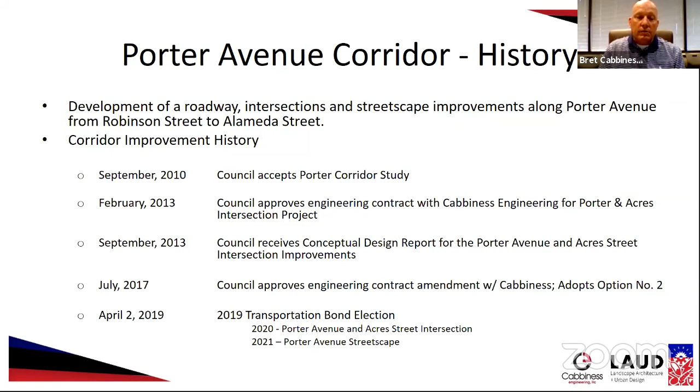So quick history - we talked a little bit about the Ochsner report. It really sparked a corridor-wide debate on how we could improve the Porter Corridor through the middle of our city. It looked at several different goals for the corridor and for Porter - streetscape, access management, roadway design, intersection design, things of that nature.

It had a lot of great input, a lot of great thoughts, a lot of good public comments that were funneled down into what the Ochsner report was. Now, the only problem with the report that we saw was that the report was really conceptual at that time.

It really had no engineering data to support some of its design concepts, although they were very important design concepts and they were good thought-provoking things.

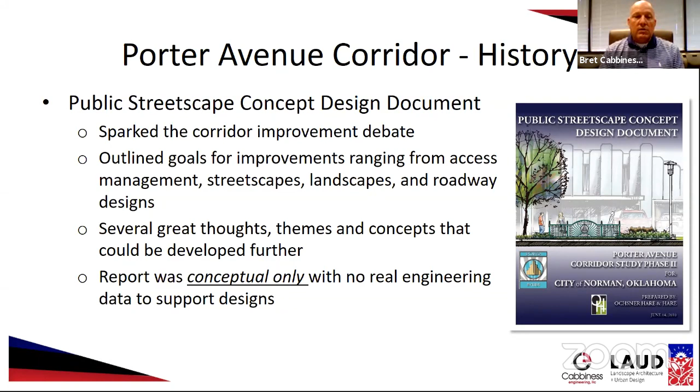So with that, we were hired, as I mentioned, in 2013 to do a conceptual study, mainly to focus on the intersection improvements at Porter and Acres.

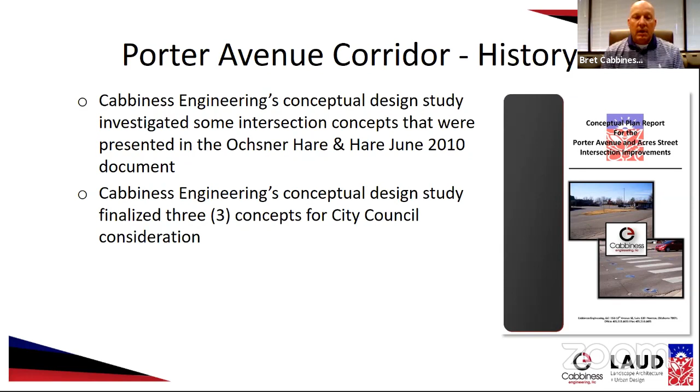We took the concepts that the Ochsner report had, and finalized them into 3 concepts for city council consideration. Those concepts looked like this. We named them design option 1, design option 2, and design option 3.

Design option number 1 looked at focusing on intersection improvements, pedestrian safety improvements at the intersection, and potential left turn lanes off of Porter Avenue onto Acres Street, meaning a 5th lane.

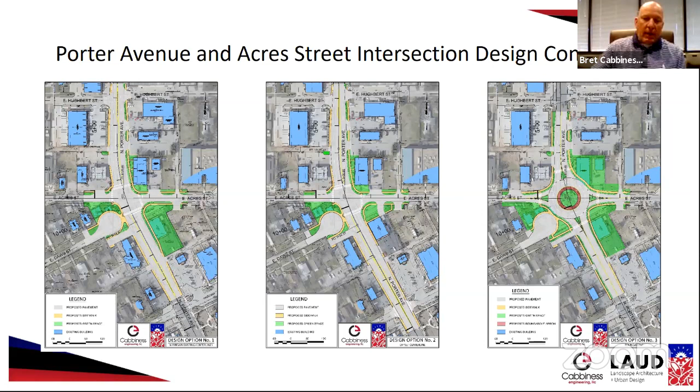Those options and the details that surrounded them were put forth to the city council for approval.

Option number 2 was approved by city council in July of 2017. It had the least impact to the businesses we talked about earlier, only impacting 2 businesses. It still accomplished the overall goal of traffic safety and pedestrian safety, allowing pedestrians to walk from the west side to the east side of Porter Avenue.

If you're familiar with this area, east of Porter Avenue is Longfellow Middle School, and west of there is the new library. So there is a lot of pedestrian traffic there, and there's no way to protect those folks. With a traffic signal, we were going to be able to protect them and give them a very easy path back and forth across.

The project improvements with design option 2 also include improved street lights, drainage improvements, and safer sidewalks.

Now, where this ties into the overall Ochsner report and the overall corridor improvement for Porter is we're going to use the enhancements developed with the concepts for the Streetscape project. We're going to incorporate those into this design as well for the intersection improvements. That basically means improved traffic signal lights, improved street lights and pedestrian lights, and sidewalks that are wider and improved with color, stamps, and staining. So it gives the intersection a very new, clean, and fresh look, and it will dovetail in well, if not exactly, with the overall improvement to the entire corridor.

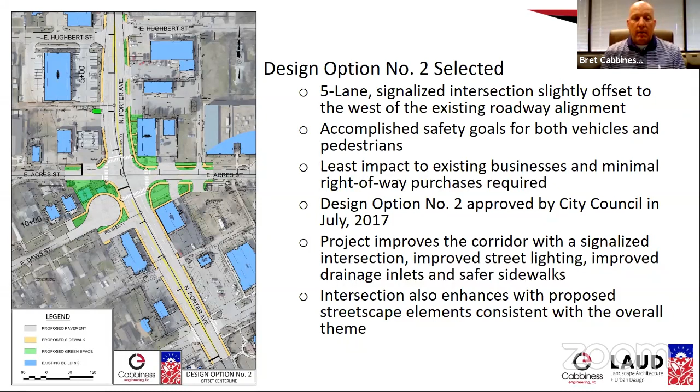Since that concept design, we've had one slight modification to design option 2, and that was basically the modification to the cul-de-sac at Daws. We wanted to again try to eliminate the impacts to businesses, so we came up with a different concept for the cul-de-sac.

We actually moved it a little bit farther to the west of where we had proposed it earlier. The benefits are we saved on acquiring another business, and that was important to us. We could also improve the parking through there, and reduce the opportunity for somebody to try to make a cut through from Daws back to Porter.

By moving it back farther west, it gives the impression when somebody comes down Daws that they have no way to get to Porter Avenue. If we had the cul-de-sac up adjacent to Porter, that would give the impression that somebody driving down there might be able to get to Porter Avenue. We don't want that. We don't want people cutting through the parking lots to get to Porter Avenue.

But we also were able to improve the sidewalk in this area, so we have a sidewalk that will gain access. So pedestrians walking down Daws does have access to Porter Avenue at this location.

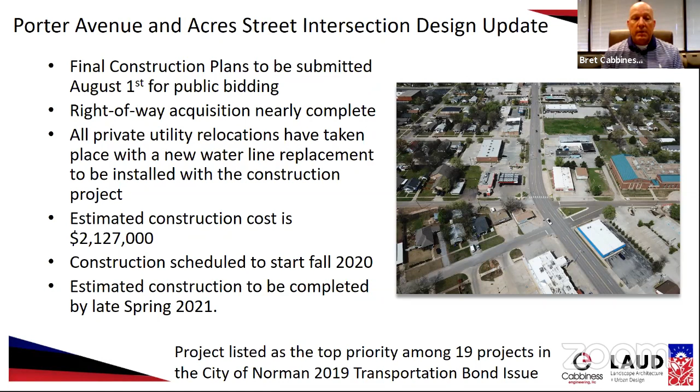Now, the estimated construction cost is a little over $2 million. And that's still in line with the original conceptual design project or budget that we established back in 2013. So right now, this was the top priority project on the 2019 transportation bond issue. Council said that they wanted this project done, and it is getting ready to go to bid and be under construction in the very near future.

So that's kind of the intersection improvement project. Now we kind of start looking at the streetscape project. And again, we reference back to the Ochsner report because it had a lot of great concepts that we could draw inspiration from, some ideas that we wanted to make this corridor improved and bright and vibrant again.

So where we're at right now is we've completed the topographical survey from essentially Robinson Street all the way down to Alameda. We started developing conceptual design themes. And when we start talking about themes, we're starting to talk about landscape themes, sidewalk themes, the traffic and pedestrian light themes, what the poles are going to look like, and how we can also incorporate and dovetail those into the Main Street corridor improvements as well.

We did have one preliminary meeting with the council, and that was back in early March of this year. And so we were ready to have the next meeting, and obviously COVID has kind of impacted that. So we're having that tonight.

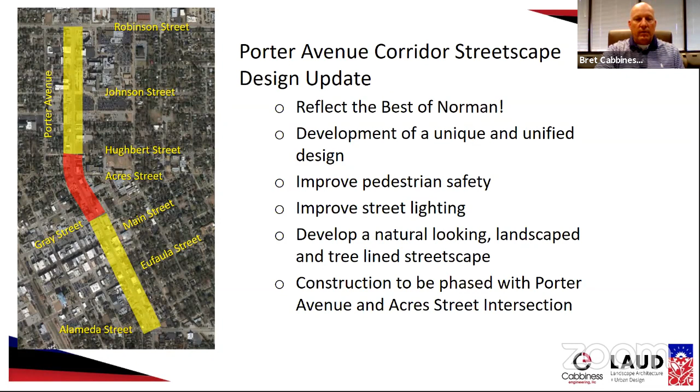Again, we want to improve pedestrian safety, we want to improve street lights, and we want to make sure that it is phased in construction with the Porter and Acres intersection improvement project. We will not do it all at one time. The intersection improvement project will go first, and then near the completion of that, the Streetscape project will be kicking off. So we do have a plan that they will be phased together.

Some of the essentials we want to look at as priorities for the streetscape: trees and ground cover and irrigation, ADA compliant sidewalks, new curbs, the decorative street lights through there, and just envision the black poles with the LED lights that are very bright. That's the concept we're looking at right now.

We want to improve some signage for pedestrians crossing the street, making sure they have a safe avenue across. And then we want to start putting some customized things into the design, such as the stamped concrete or the integrated colors of the concrete. We want to look at a covered bus shelter now that the public transit has a stop just outside Norman Regional Hospital.

So we want to make sure those things are customized specifically for this corridor. But I think one of the really cool things, and we have a rendering of it, will be the gateway entry walls and railings. That shows people, hey, you are entering the Porter corridor through this area right here. I think those will be really cool. And if we have the budget, we'll add some decorative screening, some more streetscape elements, potentially street furniture, and banners on the signs as well.

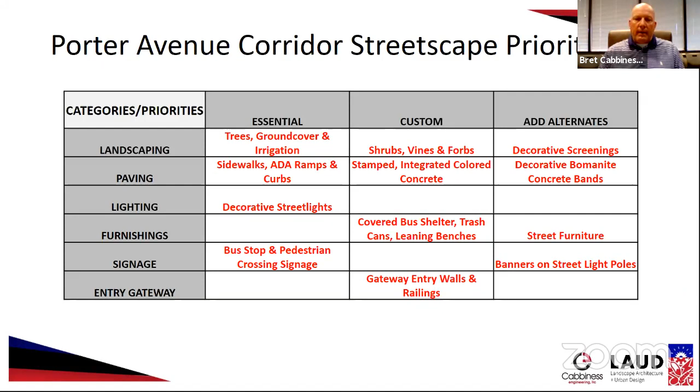So this is kind of the priority list that our design team has come up with. The essentials and the customs are things we're going to make sure get into the scope of the work. And then budgetary constraints may allow us to add some of these other amenities or extras to the project as well. So we talked a little bit about the sidewalks.

The picture on the left, if you've walked down Main Street, you see the banding of the pavers between the curb and the sidewalk. We think that concept is still a good concept. It also adds a visual buffer between traffic and a pedestrian through there. But we wanted to do something a little bit different, more unique for the Porter corridor.

So we're going to look at something of a stamped concrete in this area, and we'll have a different color scheme than Main Street. But at the intersection of Main and Porter, we've got to be able to blend what started on Main Street with what's going to be on Porter. So the two vertical slides here that you see are kind of the blending that we're going to look at.

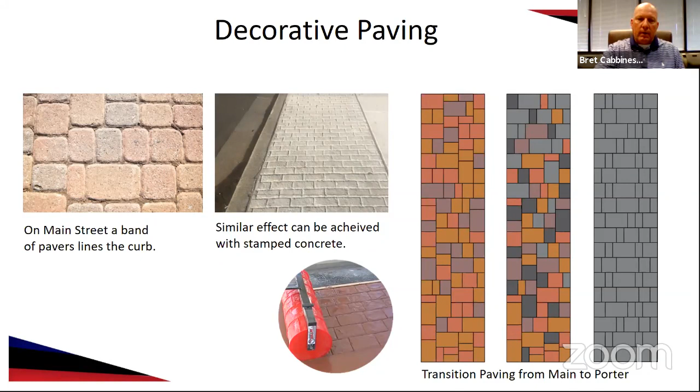And the third vertical is the dark gray stamped concrete—that's the look we're going for on the Porter corridor. It's a little Art Deco-ish, going back to the Oshner report again.

So this is the sidewalk detail that's been approved by staff. Again, you start with the normal colors of gray concrete, then you have the darker bands of the stained concrete. And then the other thing we want to do is kind of a visual banding every so often that will match up with the street lights going down—you'll see a rendering here in just a second.

So as you progress down Porter, you start seeing these bands or these visuals, and you start thinking of the speed potentially. So hopefully this is a speed-reducing visual impact that we want to add to Porter Avenue.

Now, the other thing is we talked a little bit about trees and landscaping. We're going to use a structural soil underneath the sidewalk that will give a space for tree roots and shrubs to be able to utilize some of that space without breaking up the concrete. We've all seen the sidewalks adjacent to trees that have a massive root system and how they've bubbled up and broken the concrete. Use of structural soil like this has been effective in other urbanized areas to minimize that degradation of our new sidewalk.

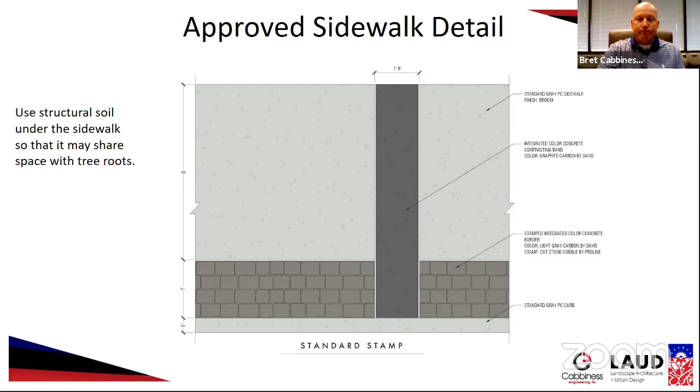So we talked about the speed checks, and this is a rendering. You see in the photo that integrated band, kind of a Bomanite, where you'll start driving down the street and start seeing this almost like a milepost. Hopefully we get people to realize, hey, I'm going a little fast, because they start to see these bands creep up closer and closer. We think those will be very helpful.

There are a few areas on some of the properties out front of the businesses that already have some landscaping we want to try to incorporate, and others where we have just grass. This photo on the lower left is a great opportunity where we can add some additional trees through this area as well. All of the trees and plantings will be more of a natural Oklahoma look, natural vegetation to our state. We've already talked with the city arborist about some of these, and we'll be putting together a schedule on what those look like later on with the design.

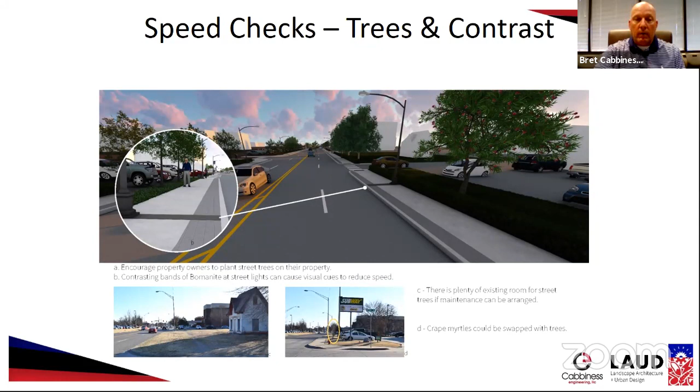So we talked about pedestrian crossings. We want to make sure that they're bright, they're light, visible for folks as we go across. We'll try to limit those locations predominantly to signalized intersections, where a pedestrian has a little more protection crossing the street. But there are going to be probably some others through there that we'll need to highlight, and there are some opportunities for additional signage to alert drivers if there is a pedestrian crossing coming up.

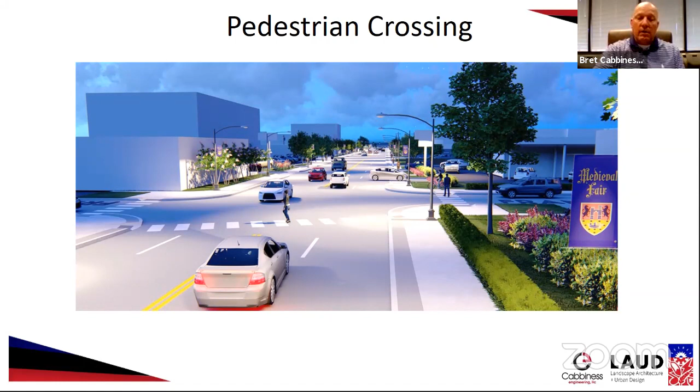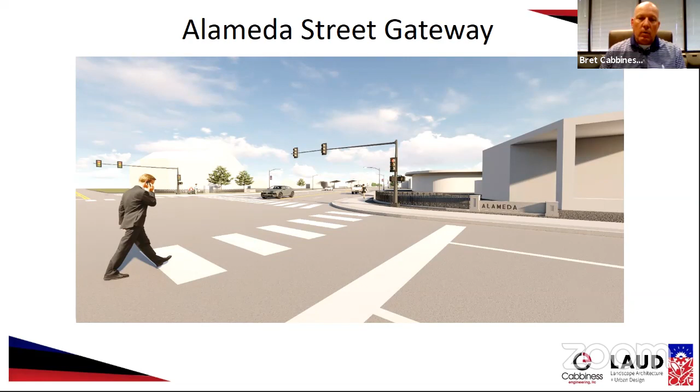So if you look at Alameda, this is looking basically on the east side of Porter looking north. This would be the northeast corner, where the thrift shop is currently located. And then on the west side of Porter, you see that we have some trees in that open space at the intersection. Again, we want to be a visible entryway into this corridor as we improve it through there.

So we talked a little bit about the bus station or bus stop across the street from the hospital. One of the things we think will be a great addition, particularly as pedestrians start finding this corridor coming back to life, is that the bus stop really needs to be enhanced, so we can protect people coming to the hospital or clinics for an appointment, giving them a safe and secure location. So we want to put a bus stop at the corner at Johnson and Porter—again, that's a priority for us. We also want to maybe put a bike repair station there, since a lot of people now ride their bikes to the bus stops and then get on the bus to go across town. So we want to add that amenity if the budget allows.

So we do have some concepts and things that we want to continue to improve upon as we get farther into the design.

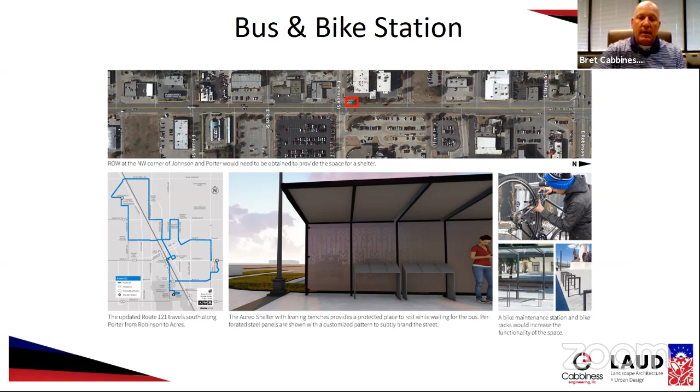So really the next steps as we wind this down: the Porter and Acres intersection improvement project's final public meeting is tonight, as we've talked about. The utility relocations have been completed and they're ready to go. The corridor is fairly clear except for the water line, which will be relocated with this construction project. We're working through the right-of-way acquisitions and easements, and then the plans are ready to be advertised in August 2020.

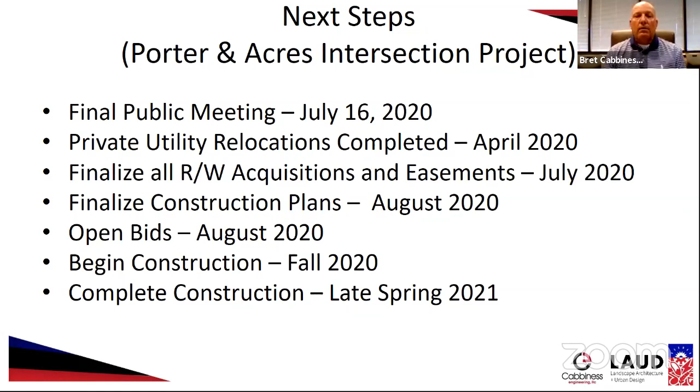That is obviously a little bit contingent on the final right-of-way and acquisitions being taken care of before that time. We want to open bids in August and then begin construction in fall of 2020, and then complete construction approximately 9 months later, which would be late spring of 2021.

The Streetscape corridor project—we talked about the March 17th meeting, and this is really the first kickoff public meeting we're having about the project. We want to push forward with our concepts and get to a preliminary design stage of about 65% complete by October of this year. That's a little aggressive, but we're going to try to push forward to that.

That gives us plenty of time to address questions and talk through potential issues with property owners in this corridor. We don't anticipate any utility relocations other than the street lights. All down Porter Avenue will be moved and improved so they're not right next to the roadway and the footings, so my daughters don't run into them driving down Porter next to a truck.

The final construction plans are going to be in March of 2021. We hope to have bids open in spring of 2021, right on the heels of completion of the intersection improvement project. Then hopefully construction of the streetscape will be summer of next year, and completed into the early or late winter—that should read 2022. Kind of got a little backwards there.

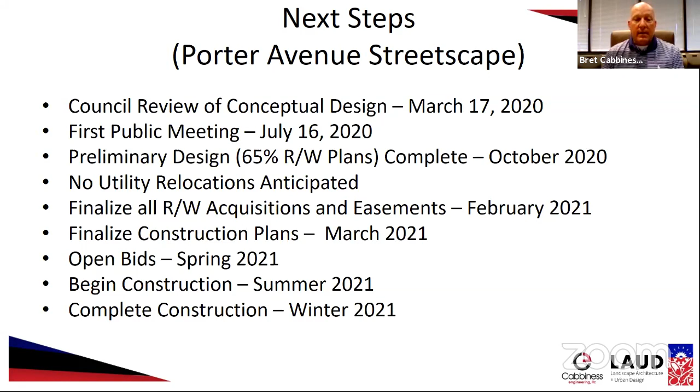So hopefully in the next couple of years, this corridor will be bright, it'll be vibrant, it'll be pedestrian friendly, it'll be improved for vehicular traffic through there. I think it'll be a great project and potential jewel for Central Norman to make this area come springing back to life. So with that, again, we come back to the comments or questions page.

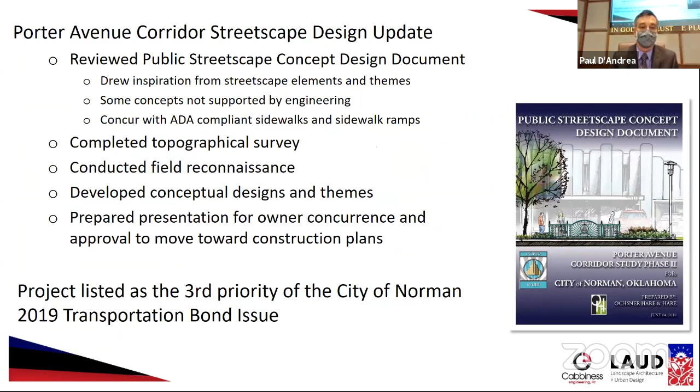Someone has asked if we could please go back to the slide showing Porter and Acres. Okay, let's get that back up for a few minutes. Assume the plan view. Probably that one. We've got some other questions coming in here. Slide that down, I can probably look at it.

Ty Hardiman says, are you saying that the future daily traffic count requires Porter to remain 4 and 5 narrow lanes? This seems like a traffic plan from 1960 instead of 2020.

Again, I think Larry's going to be able to attest to this a little bit more than me, but with the James Garner Avenue project, that is what is projected to take a lot of the traffic off of Porter Avenue for people going out of Norman or coming into the downtown area. Again, we recognize the Hiland Dairy is going to be there, so we know we're going to have truck traffic as well. But again, we're constrained by the right-of-way on what we want to get accomplished.

Yeah, I will add to that, Brett, if I might. Again, that's exactly right. In the Porter corridor study, there was a very brief transportation analysis conducted really for this very point. There was a desire, the questioner is exactly right, there was a desire in the Porter Corridor study in 2010 to narrow the number of lanes. There was discussion about roundabouts here at Acres, and I think a roundabout perhaps at another location in the corridor. There was discussion of a 3-lane configuration. All of those things were really valid discussion points.

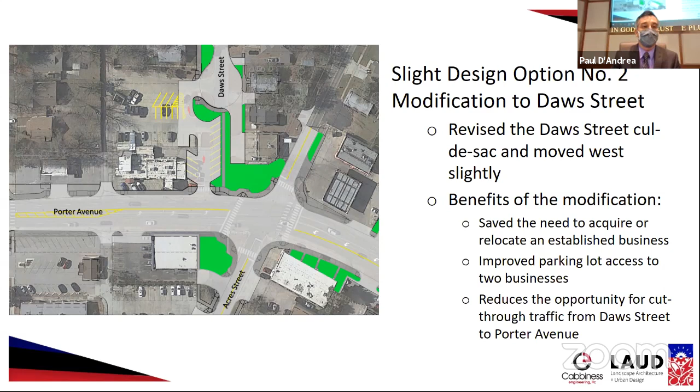With that, I think I've got one more coming in. We'll answer this last one and call it. If you think of other questions after this, again, that's my email address here at the city. I am happy to respond to those individually anytime - just feel free to send them.

Okay, we've got two more here that just came in, and we'll address those, and then that'll be it for the night. Another one from Kamala Jolly Stewart: future daily traffic count is contingent on street design. We want less traffic and bike lanes.

We got another one in from Terry Reed on the computer: can bike lanes be added to either east or west of Acres on one of the side streets? I should have had our transportation engineer with us tonight - I didn't expect this much interest in bike lanes. That's great. Again, happy to relay those questions to our Bicycle Advisory Committee and our staff that works on trails and bike lanes. I don't know the answer to that tonight, but we'll be happy to refer that to the folks who work with our bike path and bike lane program here in Norman.